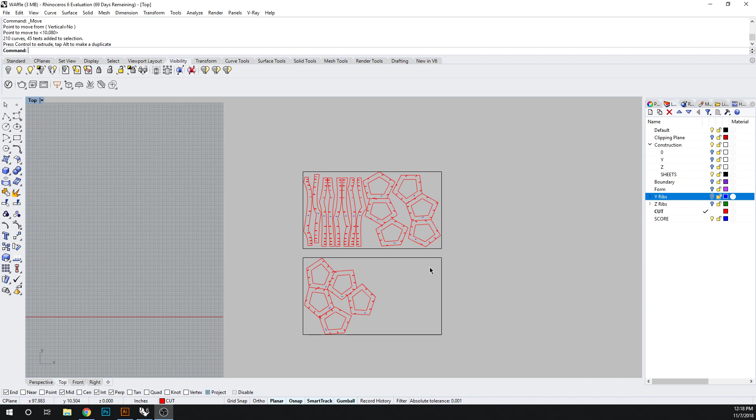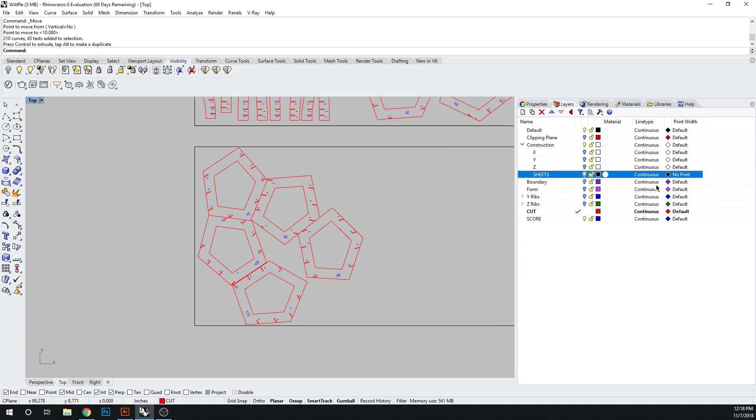So what we have here is our sheets are laid out. This tutorial is going to cover how to print from Rhino. So I have waffles in, my profiles here have cuts and scores. Let's expand our layer property and look a little closer at what's going on. So I have sheets which are under our construction layer. These are going to have a no print, and these can be a hidden line.

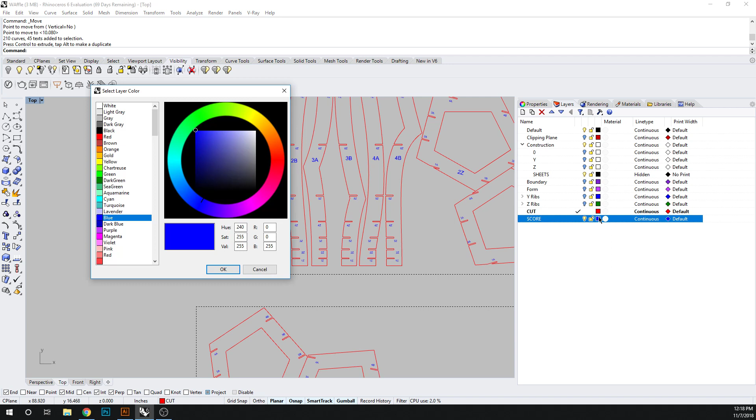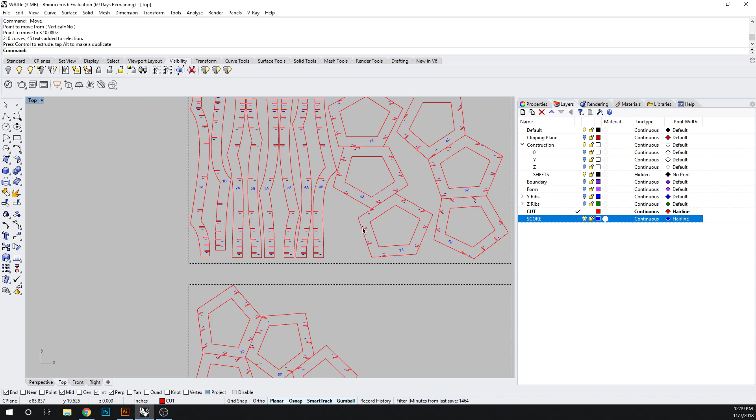So in order to print from Rhino, you need to make sure that the color for your cuts is appropriate. It needs to be the RGB red, which is defined here as 255. The same for your blues, this needs to be a pure blue, so blue needs to be 255. Your line types in each need to be, your print width here needs to be a hairline, and hairline. So these are the conditions for our particular laser cutters. Make sure that you have your print width as hairline and that the colors are indicated as true red and true blue in an RGB coding.

So let's go to Ctrl+Print, and let's take a look at this here.

So in order to do this, make sure that your laser cutter shows up in your destination. Now the size is the size of your frame. So in this case I have it by 32 by 18. It's a vector output, and I want to make sure that my output set to my print color. Remember, my print color is here, it's defined by the layer.

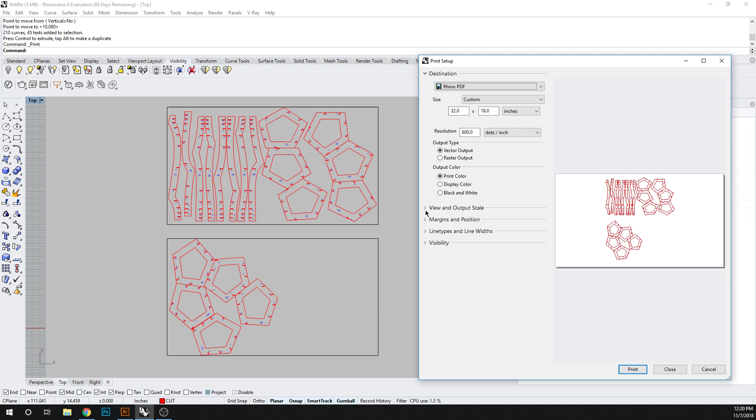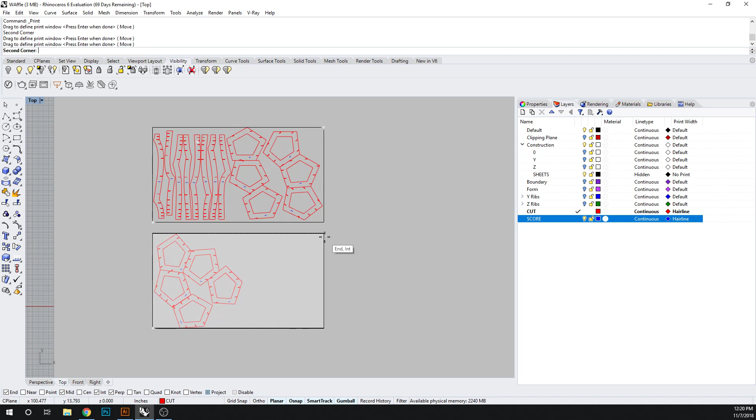So here we can say window, and we're going to say set. And we drag it across, and then we say enter. And then we hit print. We can also do this in the same way here, so we can say set and move to the next one, and hit enter and print again. That's how you print from Rhino.